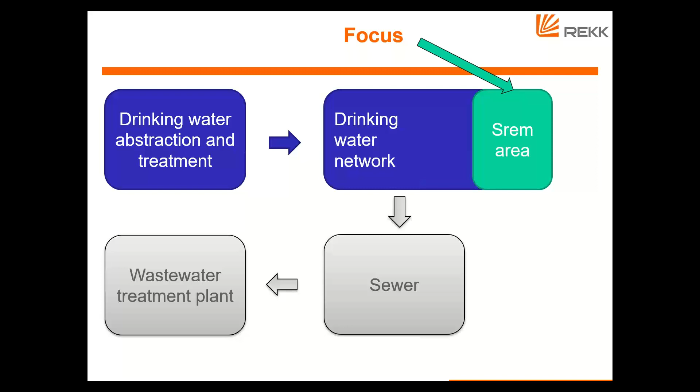All of these components can be substantial energy users. In the case of Novi Sad, based on the project concept, we focused on the drinking water network, and within the network we selected one area, the SREM area. Novi Sad is kind of like Budapest - there's a flat part and a hilly part, and the SREM area is the hilly part. Even though only less than half of the consumption of drinking water takes place in this area, the majority of the drinking water network's electricity consumption takes place here. So this is the place that offered the largest possible energy saving opportunity for us.

So we wanted to know about this opportunity, whether there are sensible measures that can reduce energy use. This was part of the engineering analysis to create a hydraulic model, and Zsuzsa and Erzsi from DHI will talk more about that. Based upon this calibrated model, we started testing different measures, different scenarios, and as you will learn, pumping efficiency has been the way forward identified by our experts, our engineers.

Then within REKK, energy market forecasts were created to know the value of the saved energy. If you're talking about an investment into energy efficiency, we should know what are the returns. These forecasts, since we're talking about long-term investments, are very important because we want to know not only the current price of electricity, but also the price in 5 years, 10 years, 20 years.

We also quantified the related background CO2 emissions, because the electricity is purchased from the network, and there are some power plants which are fossil fuel based and emit carbon dioxide. So we wanted to know what is the carbon dioxide emission related to the energy consumption and also to the energy savings of the Novi Sad Water Utility company.

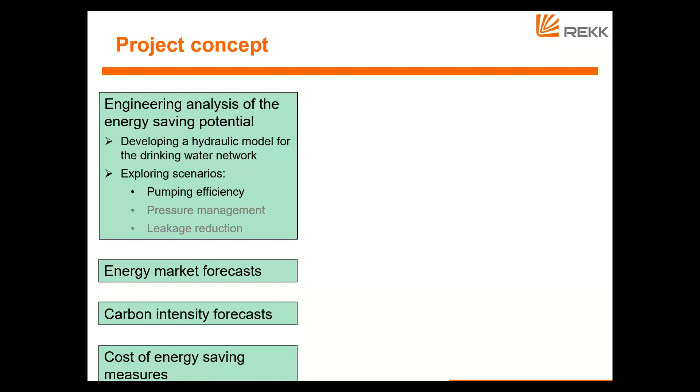And finally, once the energy saving measures were identified, we wanted to estimate the cost of these measures, the cost of the investments. Then when we have all of these components together, we can create a cost benefit analysis to see how feasible these measures are. This is a key output of our project.

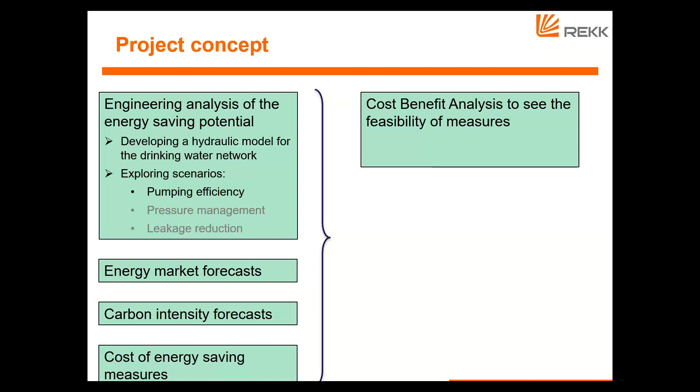At the same time, during this 1 year, we also wanted to provide and share some of our knowledge and experience with the employees of the Novi Sad Water Company, especially about the hydraulic model's operation, which they can continue to use after the project ends. And then we have dissemination as also a key target - we are holding this webinar today.

There will be a report in English in the coming months, and the executive summary of this report will be translated and made available in the Western Balkan languages. So in a nutshell, this is the project concept, and within today's session, we are going to start.

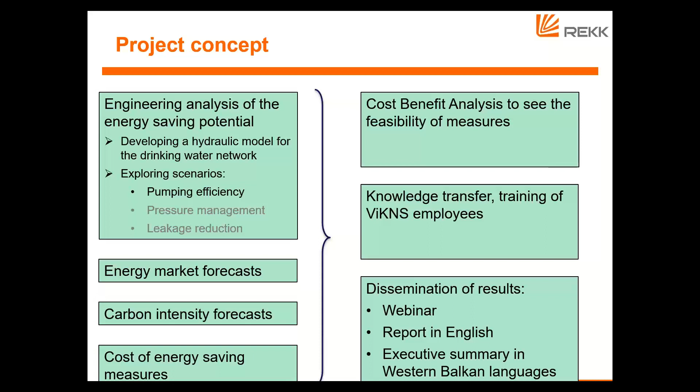Zlatko will tell about the Novi Sad Water Utility company and the drinking water network. Then DHI colleagues will talk about the hydraulic part, and then we'll go on to the economic components of the project. So I hope that you will find it useful. With this, I'm ending my presentation, and let me hand the floor to Zlatko now.

Hello, everybody. Do you hear me? Yes. Okay, so ladies and gentlemen,

Now we are going deeper into the technical aspect of this project. I will make some kind of introduction of the project, to describe to you the water network, water system of the city of Novi Sad. That is the second largest city in Serbia, with a population of about 400,000 people.

Now I would like to share my presentation with you. Is it visible? Do you see it? Yes, we can. Yep, okay.

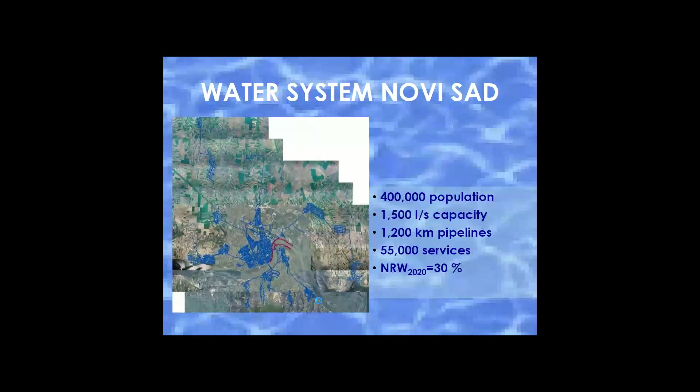So this right bank of the Danube was the subject of our project, in a sense, to establish a model, to calibrate it, and finally to make an energy efficiency analysis with some case study and cost-benefit design, with the proposal that designers finally gave to us as a final report.

So the subject of the modeling was a network of approximately 200 kilometers of pipelines with 15,000 connections, mainly house connections with individual houses, 15 reservoirs, 14 pump stations, and finally 15 pressure zones, with a population of about 60,000 customers. I made a question mark here because the last census, the counting of the population, was established last time in 2011, and we expect it to happen again next year.

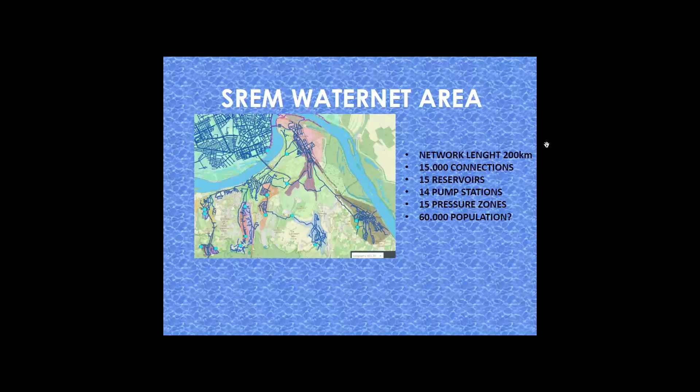The SREM waternet area was an extreme complex system for modeling. This dozen of pressure zones are split, physically split with breaking of pipeline of closed valves. It was important during the designing of the model to define each point to be very precise and detailed, to really establish the model as similar as possible with the real position in the system.

Also, the database of consumers should be established in a manner that each connection was at the place, at the node, at the junction of the system in the model, as it really is in the field.

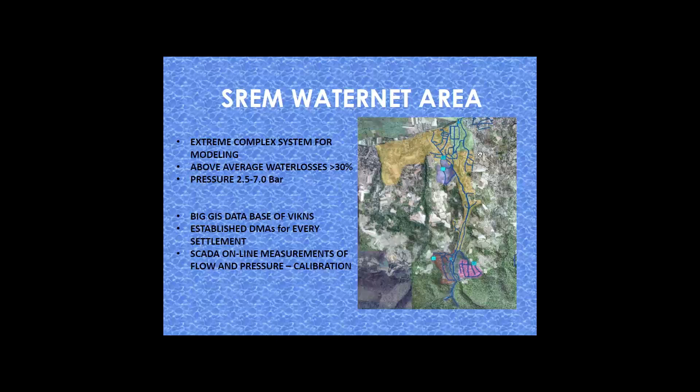But finally, through this cooperation and partnership with the designers from DHI and REKK, they did it. Finally, here we are at this final presentation at the end of the project with a successfully established model that was actually a base for the further step of this project: an energy efficiency analysis, with results that will be explained to you during this webinar in the next presentations.

So I just explained and described this system. I hope that you can now have insight to understand how this system works, how it looks, as an introduction to make it easier to follow the next presentation, where my colleagues from Hungary will go deeper into technical aspects of this project. This is just one sketch of our GIS platform that we use every day, and the database used in this modeling was actually obtained from this huge amount of database from our GIS database.

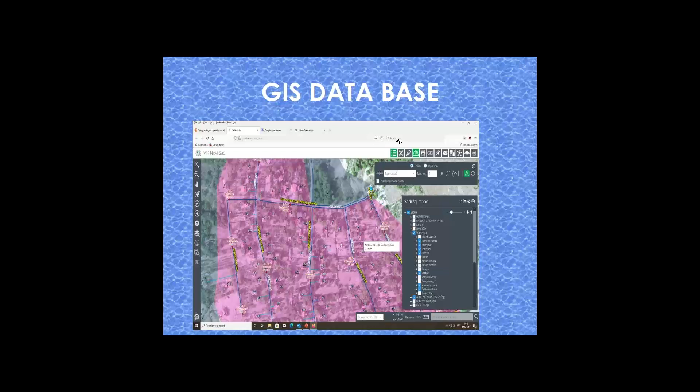Thank you, Zlatko. I think this has been a great introduction to Zsuzsa's presentation, and I don't take any more time. So Zsuzsa, please. Now that you can see, can you see it?

Yes, but it's not projected yet. Okay. It's okay now, right? Okay, so I hope that right now it's fine.

So welcome everybody. It is our pleasure to be able to present to you the results of the project from the part where we were responsible. It was a very challenging and an extremely nice collaboration, I have to say. It was challenging because of the pandemic, and also that we could not meet personally except at the beginning and at the end. But the collaboration was really great, and let me thank here all the inputs, all the effort, and the great job which was done on the Serbian side at the water utility company.

Without them, this project and this result we have presenting right now wouldn't have been possible to carry on at that level. Indeed, as Zlatko presented, our task was to define the network system, to describe the network itself from the water supply perspective, how the energy is used.

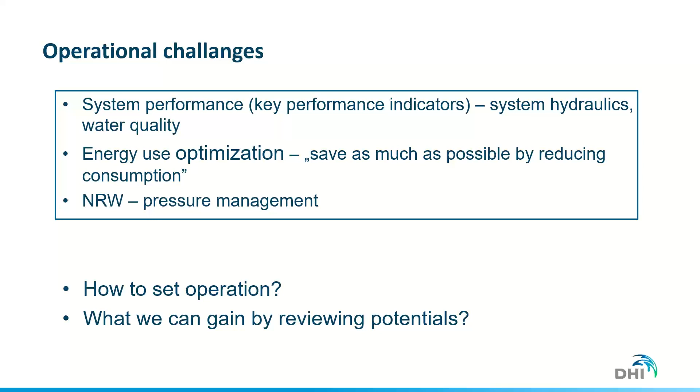So the big challenge right now is, if we would like to put together all these things, how is it possible, how to set the operation so we fulfill the energy use optimization, fulfill the system hydraulics expectations and the water quality issues, especially in very complex systems, and what we can gain if we start to understand the system, and what we can gain if we really look into the backside and review all the potentials, or at least selected many potentials.

So the question comes, what can we do if we take this line, where can we arrive if we do business as usual. Each water utility has its own mindset, how they operate the system, from habit and from business as usual, because this is what they know, this is what they feel is the ground, the base, because they have many years of experience.

Indeed, we were also interested in what will happen if we change our habits a bit, only a little bit, which means a change in operational rules, and we try in some terms to risk something which is out of the business as usual.

Indeed, the question also comes, what will happen if we even invest in big changes, whether there are options for these kinds of big changes, but potentially driving to big gains. And then again, as the unusual approach, if there is any gain, if we look at savings from the non-standard perspective.

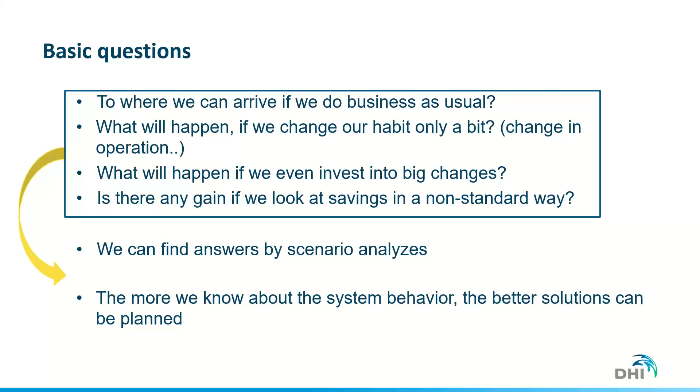So it means that we can analyze this through scenario analysis. And by knowing more about the system behavior, we can better plan what we can do and how we are going to do it, because we know how to make it.

This is a very complicated system, but to describe the system behavior and deliver it in an understandable way, we need the digital twin, a visualized descriptive method of the system, which could be delivered as a calibrated hydraulic model.

It was very interesting during our discussions and workshops, since typically in water utilities there are separated groups working in energy, hydraulics, and GIS departments. But once we put these teams together as a pre-requirement for the hydraulic model, it leads to common knowledge and common experience.

This common knowledge can drive us to a very high level of system performance analysis and understanding, which can lead to very good results in terms of delivering good potentials for system improvement, through measures such as investments, operational changes, or both together.

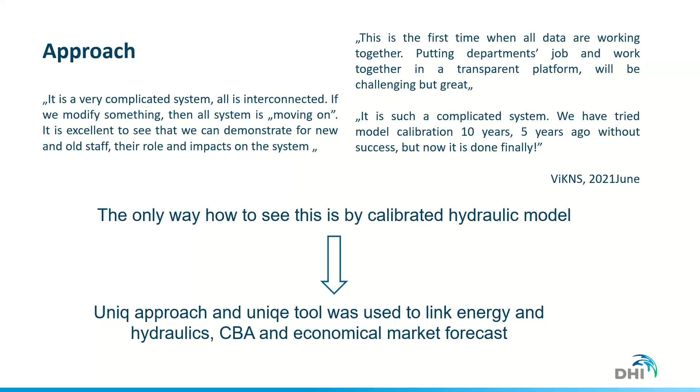This was a big challenge also for our water expert team, to develop this link and to have the work of a completely different sector, the energy sector experts, included in that.

So there's a solution that was developed, and we really implemented the work in such a way that we described the entire system, not just bits and pieces of it, and looked at what happens.

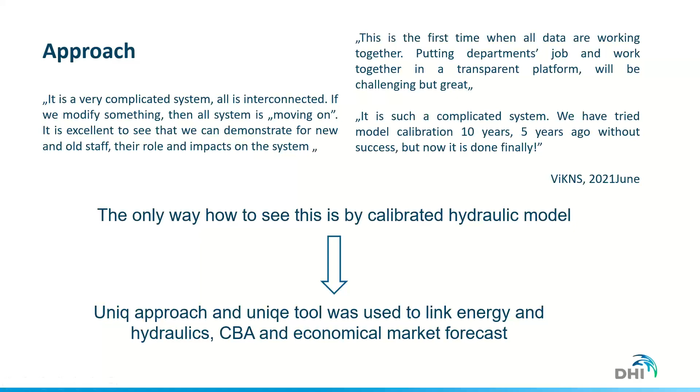As we mentioned, once we see how we modify one element in the system, we could also see how this modification moves through and affects the system. As you see, the system is very complicated, and my colleague is going to explain a bit more in the following slides.

If you make a change in one part, like the element containing 14 pump stations, which means approximately 45 pump units, changing something in one pump definitely changes the hydraulic conditions and water quality in the system.

So it was very important to provide a system that describes this from this perspective. This could also be presented to different units in the water utility company, each targeting only one area or field of expertise, so whoever is responsible for one pumping station could see the impact on other pumping stations as well.

Because as you are working, say, in the airport in the tower, there are so many flights going there, and you cannot concentrate for a very long time on all these patterns. Here we have the descriptive tool, which could substitute this, so you can concentrate on your task, but with this help you are able to see what's happening in the system itself.

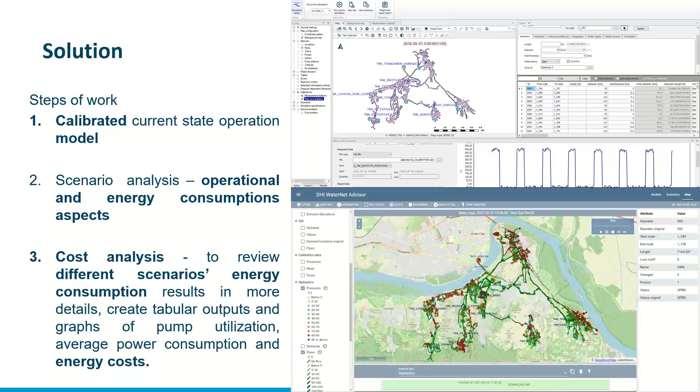So then let me give the floor to my colleague, Mrs. Erzsébet Piesko, who was the leader of the modeling team, who will now describe the modeling that has been done, and also pick up one or two results that were delivered and discussed.

Just really shortly, our main aim was to develop a model, as already Zsuzsanna and Zlatko told you, that can describe all of the operations inside the network, with as minimal schematization as possible inside its operation. So that was our main aim: to have this operational model, this extended time period model, developed based on longer time period statistics that can be used for further analyses.

So altogether, what you can see here you can compare with Zlatko's presentation before. Some small schematization was needed, but altogether we have all of the main hydraulic elements of the model implemented, all 45 — it seems we ended up adding one more, so it's outdated from yesterday's presentation. Some of the reserve pumps are also implemented, and all of the tanks and breaking chambers were implemented in the model, so that it's not just serving the purpose of cost analysis, but also serves as an operational tool in the future for the water utility.

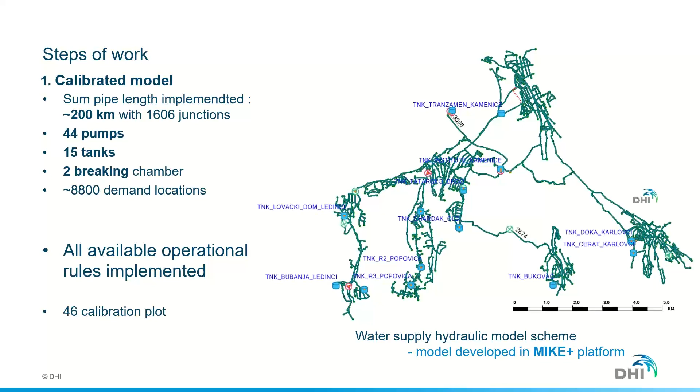So we built the hydraulic model based on the GIS customer information system and other sources available, made in commitment with the group together with the local users and the local water utility — some changes in the model, some cleaning and revision of the already available high quality model, high quality data. But it needed some, so to say, some improvement to be implemented inside the model itself. So this digitalization and revision of all the information in one platform was integrated into our model.

And it also integrated the local knowledge of experienced users and experienced operators, because some of the data cannot be written inside, so to say, in PDFs or Excel sheets or GIS systems. Some of the local water utility members really gave their all to be able to build a very high level model for this network.

So in the end, we calibrated for a selective time period in September 2019, but we also used validation data from other time periods. As Zlatko mentioned, we used one year of time series to be able to build this model.

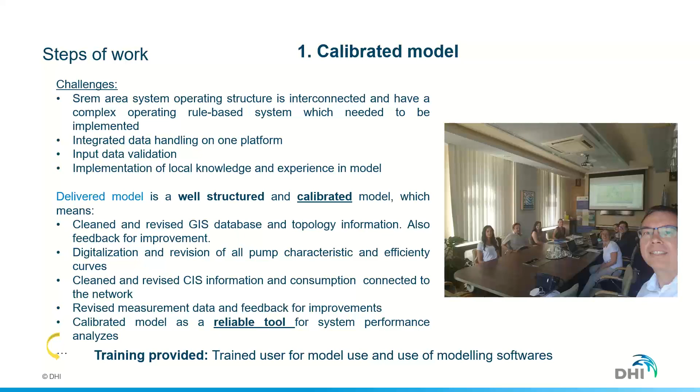This is the one we were only able to hold in person. The others were held online. So altogether, we developed...

The energy optimization consists of the review of the pumps' operation, their efficiency, and also a system-wide energy audit. Based on that, we came up with different kinds of scenarios, some of which you can see on the slide itself.

Also what later on András and Enikő will present in the later sessions. We also took into account not just the technical and operational aspects of the network, but also what would be more beneficial in financial aspects of energy usage.

So that's why it's hard to say how many scenarios we actually had. We actually started with over 40, and we had to go down and cut it down, because some of them...

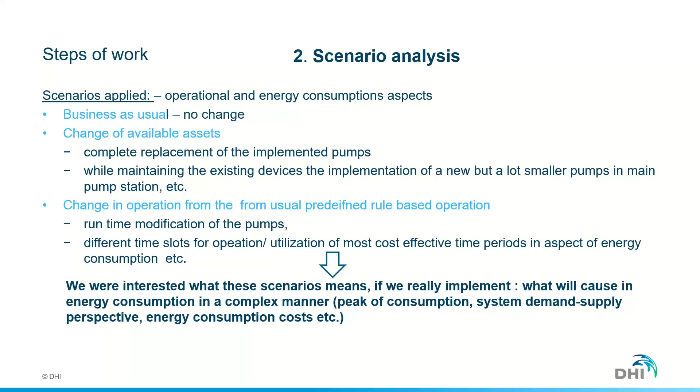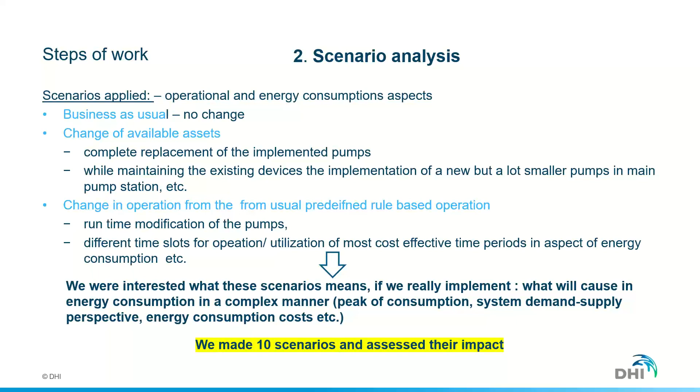But actually, there were many more KPIs that we took into account when developing our model. So altogether we took into account 10 scenarios that the colleagues and András will present later on. I will explain in the next slides why and how we chose these.

So actually, the scenarios take into account both technical and energy aspects of operations, and the energy audit is based on our hydraulic model that's calibrated for the already available data. We use the results as tabular reports and graphs for pump utilization.

We calculated average power consumption and energy costs in different scenarios in 10-minute time steps, which consider both energy and operation aspects. We also calculated peak, average, and minimum energy consumption for all the pumps system-wise, and later on focused on the pumps and pump stations.

Actually, in our case, it was one big pump station that we had to mainly focus on, because that was taking most of the energy in our case. You can see on the right some of the outputs that are already available.

This is actually some of the inputs for the analyses that REKK and András were making. These are what's already available for the users as tabular and graphical output for our cost analysis part, and also the energy analysis part.

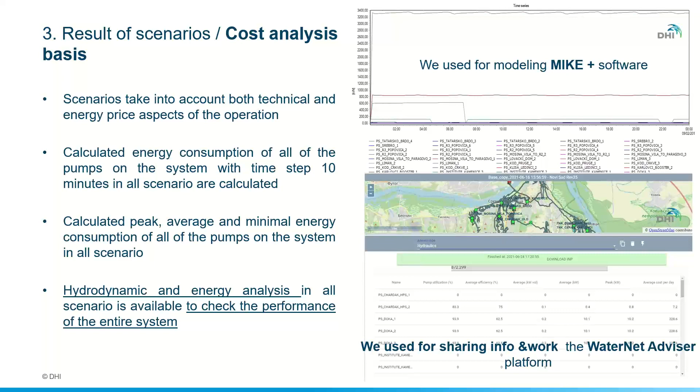As I mentioned, our main target in the end was the main pump station, Liman. As you can see, it is on the other side of the Danube bank.

As this main pump station was consuming most of the energy, scenarios aiming at the Liman pump station gave the best results for our further analyses. So actually, what we were talking about...

We can summarize it in 3 main scenarios: either complete replacement, implementation of a bypass or auxiliary pump, or runtime/time modification of the pump. Mainly, using these scenarios for the optimal time slot or energy cost was not always possible to fulfill the system demands, or it could create hydraulic conditions that cause operational problems.

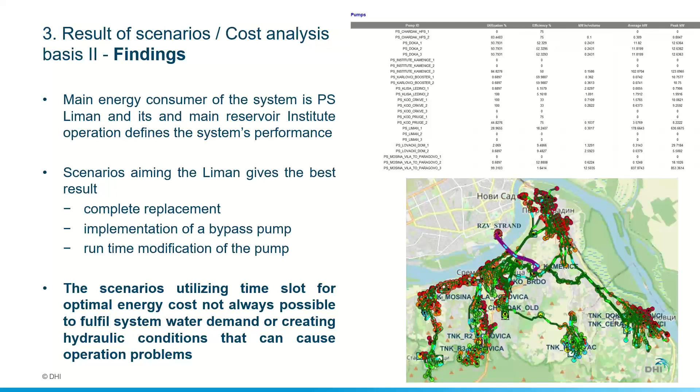We were mainly looking at - Enikő will show the energy sector forecast - and we were mainly using her findings about the energy sector, aiming for more optimal operation in terms of energy consumption.

So altogether, because of time constraints, we cannot show all of our available scenarios. We will be using the Liman scenarios as the main scenarios. As you can see, these are the main 3 elements of what we were aiming for.

So the complete replacement of the implemented pump with a different kind of efficiency and larger performance reserve, or also maintaining the current assets and adding auxiliary pumps or bypass pumps.

We also made these changes, maintaining the existing devices and implementing additional devices in order to reduce the load of the main pumps, to increase the efficiency and the reserve inside the pumps.

So we were also making different operational changes. In what András will show, we will take into account the longer operational hours, or different operational hours, and how does it affect the operation of all other pumps inside the network itself.

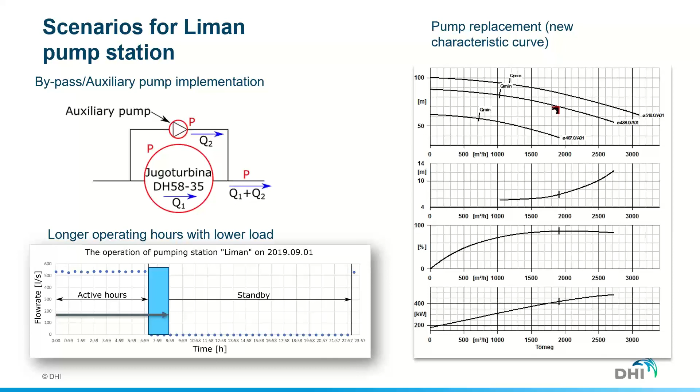And what we also use, these are the tools that we use for analysis. Both graphs and tabular analyses are available. We use the MIKE+ platform with water distribution extension, and also the WaterNet Adviser.

This is the online tool for further analysis. It also contains most of our tools for this analysis, as I mentioned, and these will also be implemented inside the water utility itself. These were the tools that supplied the basis of the further analysis by András and other results.

So thank you, Erzsébet. As the last sentences, I would say as the lesson learned for this exercise, which was really a complicated system, but a very nice system, and took a relatively long time to arrive at this point, because to find the best solution or the best options, it needs iteration to understand the hydraulic, water quality, and energy relations by changing the elements of the systems.

And indeed, if we have the change of the daily price of energy, and we take it into consideration, and we try to find the best solution, we always need to check whether the system capability allows that, as well as the hydraulic or water quality conditions of the system, how it would look if we implement these measures.

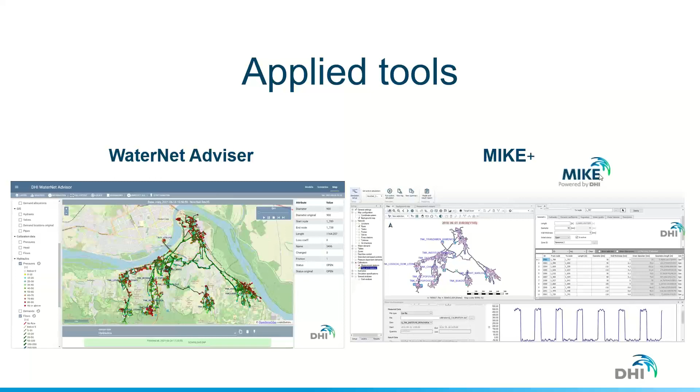Please, Enikő. Thank you, I just try to share my screen. I hope you can see it. We can see your PowerPoint, but not the projection yet. Not yet, I tried to enter the full mode. Maybe. Okay, just a second, maybe I just try to share the screen itself. Just a second. We can see the presenter mode now. Presenter mode, oh now it's fine. Now it's good, okay great. Sorry, I have two monitors and sometimes... Okay, so thank you very much.

As we are already ahead of time, I will try to be as brief as I can, and we will still have some time in the question and answer session to clarify things. So what I would like to talk about now is the electricity price forecast that we carried out for this project, and also the logic of the energy cost calculation that was based on this forecast.

So the structure of the presentation is that first I would like to share a few things about the market model itself that we used for this forecast. Then the main part of the presentation would be the exact electricity price forecast, and also the forecasted CO2 intensity of the electricity production. Then I will turn to the logic of the cost calculation. But actually all the results will be summarized by András in a later presentation.

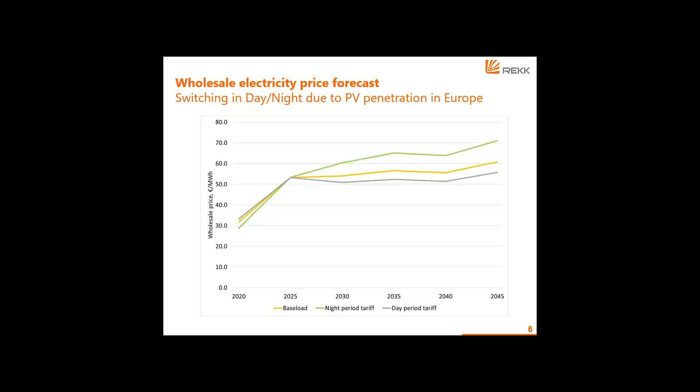So this is basically our forecast until 2045. Here you can see the average yearly prices. Baseload means the total yearly average, and then we had the different tariff periods, so night and day period averages for every year. You can see this switch from around 2025, but very clearly after 2030, that the night period tariffs are much higher than the day period tariffs. This is mainly driven by solar energy.

Just a few words about the CO2 intensity of electricity production. The key issue here is that in the future we will have much less fossil production and much more renewable, and this leads to a drastically decreasing CO2 intensity of electricity production. From 2030, we have around 30 or even less kilograms per gigajoule CO2 intensity in electricity production, while nowadays we are over 200. So this is absolutely a drastic decrease.

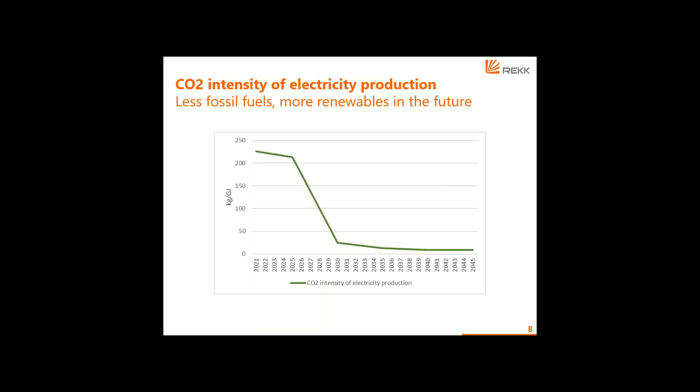What we can also see is that, again, in the middle of the day, we have in the future this lower CO2 intensity because of the higher share of renewable production in those hours. So this is absolutely in line with cost-saving efforts. It's good news that when we want to save cost, we will most probably save CO2 emissions also.

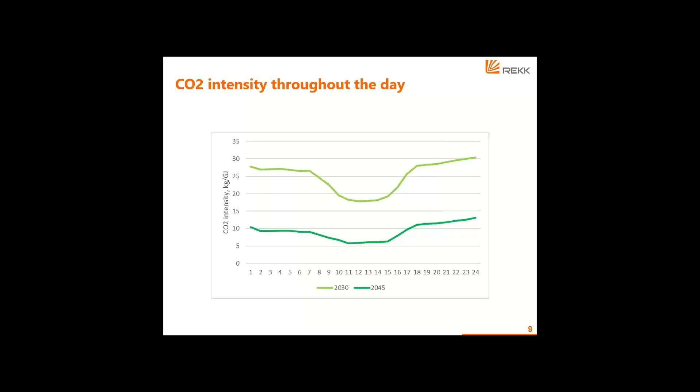Just a very few thoughts on the logic of the cost calculation. Basically what we had as a starting point was the elements of the present pricing. We received different existing bills from the partners, and based on that we created the future energy cost calculation. Most of the elements were kept at their present levels, but the energy fee was the one that changed across the years and the scenarios.

According to these bills, what we see now is that we have a high and a low tariff period - that is basically the day and the night hours of the given year. The consumption is just put into these two periods, and we have these two different tariffs, both for the network tariff elements and also for the energy component.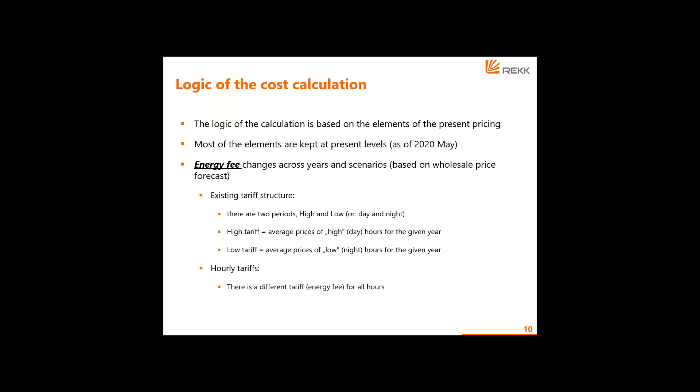What we assumed, in line with the liberalized energy market experiences, is that later on hourly tariffication will take place. That means that as we have different prices for different hours in the wholesale electricity market, this can also be reflected in the bills at the consumer level. So if you have different consumption levels in different hours, you will also have different tariffs to be paid in those hours.

This is basically how the cost calculation looks. We have the network fee element of the total cost, which in our assumptions for the future also equals the existing structure. Then the main part where restructuring of consumption, and also the level of consumption, can have a great effect on the final cost is the energy component part, where we have these hourly energy tariffs and also the hourly consumption from the hydraulic model.

And of course there are some other fees, such as taxes and levies, the energy efficiency levy, excise duty, and so on. We took all this into account when we calculated the total cost.

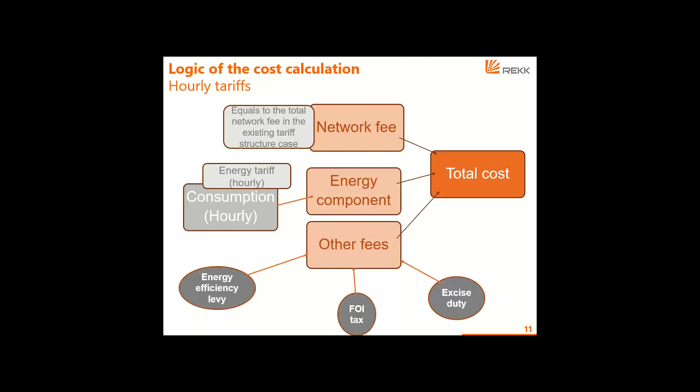And then, of course, we can have these different scenarios with different consumption patterns, so we will arrive at different energy costs in these cases - but this is something that András will tell you more about. So I just wanted to say all this, and I'm absolutely happy to have your questions after András' presentation. Thank you.

So let's see how hydraulic modeling and energy market modeling and other elements come together to provide the full picture. Erzsi was describing the wide range of scenarios that were analyzed, and out of these we selected the scenarios that make sense from the perspective of energy saving, water quality, hydraulics, and so on. This resulted in a baseline scenario and six modifications of the baseline.

What are the modifications? In S1, the original pump, which is Jugoturbina - the big pump that is supplying from the drinking water treatment plant the SREM area - is exchanged to a brand new pump. We were working with a specific pump, KSB Omega C, just because we were able to get a cost estimate for that pump. The same hours of operation, essentially during the night and early morning.

In case of S2, the original Jugoturbina pump is left, but there is a bypass pump, as explained by Erzsi, to reduce the capacity requirement and make it easier for the pump to operate. This also requires a frequency control device - so this is a bypass pump and frequency modulator. Again, the same seven hours of operation.

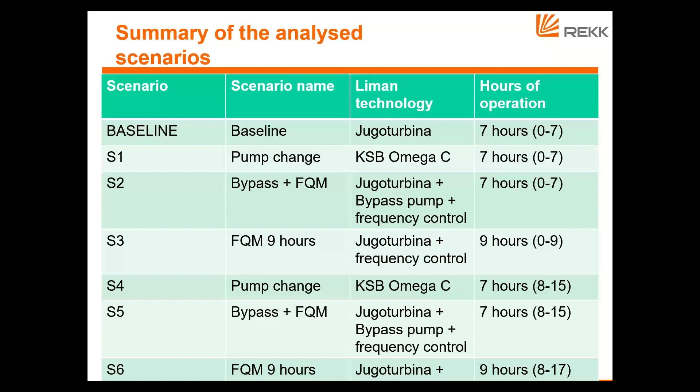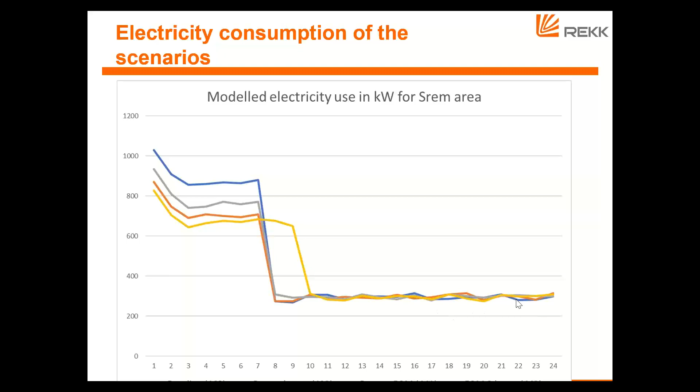So these are the baseline scenario and S1, 2, 3.

Here, same story, same technological applications, except that now the hours of operation in the scenarios shift from the night to the daytime because of the expected price drop during the day, due mostly to the solar penetration, large solar volumes. So very similar, but we still had to model it because there are different consumption patterns during the day and during the night, and it's important for us because whatever happens in the system, as it was explained by Zsuzsa, it has an impact on something else.

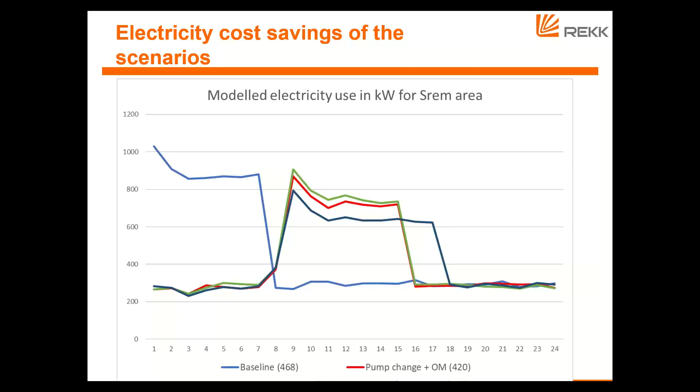So we cannot just simply assume that we have the same consumption as in the night. In the day, it is somewhat different. Not much, but there's a difference.

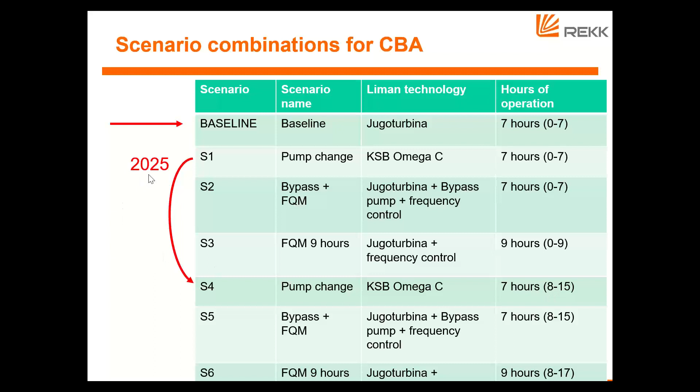From the original 7 scenarios, we created some combinations. So we have the baseline, and then there is this pump change scenario. But we assumed that from 2025, we are shifting the hours of operation. Same technology, but the new hours of operation, because from that point on, it becomes more attractive.

With the bypass and frequency modulator, same story, but the shift already happens earlier. And with the frequency modulator and 9 hours of operation, the shift happens already in 2022, mostly because the 9 hours of operation already extend into the morning rush hours as far as the morning peak consumption on the network. And this is creating a slightly different consumption profile, and it makes sense to already shift the consumption to the daytime hours. So it can happen actually rather soon on the open liberalized electricity market.

We also did a shift in the baseline because as we inspected the scenario, it turns out that from 2025, it makes sense to shift from the night to the daytime hours. So we have 4 scenario combinations, and these are the ones that we are going to compare.

We also had some hydraulic model runs in which the hours of operation were split. So some of the peak hours stayed in the night, some of the peak hours went to the daytime regime, but running these pumps at peak capacity twice a day means some problem for the network hydraulics.

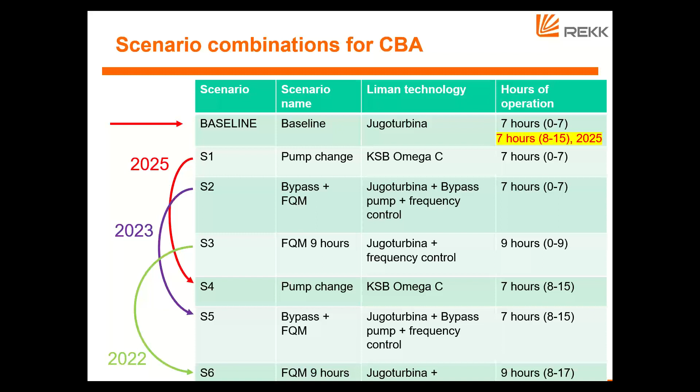It can create pressure fluctuations, and that can result in breaking pipelines. So we eventually disposed those scenarios, and we stick with the ones that you see on the screen.

So we did the cost-benefit analysis. What are the main components? We are looking at the current investment costs, changes in maintenance costs, future electricity cost savings. We are also looking at the carbon emission savings, but we didn't make them part of the CBA, the cost-benefit analysis.

Because that's like one large step how to sell carbon savings, so we will cover that, but we didn't make it part of the balance, CBA balance. And we calculated present value for all scenarios and also internal rate of return.

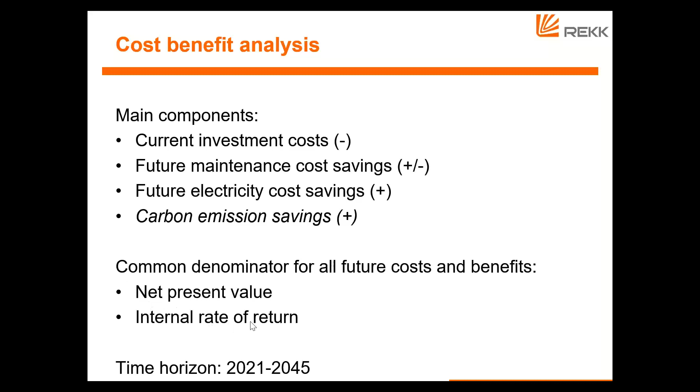For present value calculations, since we are running short of time, I don't want to spend now time on this, but if you have been doing cost-benefit analysis, you know that any money that's further out in the future, it means less current value for that money.

Same as with a bank account. If you put some money into your bank account and there is an interest rate, then in the future that money will be more valuable. It will have earned some interest rate.

With discounting, we do the opposite. We are looking at the future value and calculating the current lower value. So this is what we have been doing for all the scenarios.

And let's see what are our main assumptions. For the baseline, there is no new investment, but there is an expected reconstruction cost that will take place sometime in the not very far future. And we estimate the cost of 50,000 euros.

We also have a maintenance cost for the pump, the Jugoturbina pump, estimated at 6,000 euro per year. And these are the investment costs for the scenarios with a pump change, bypass pump, and frequency modulation, or only frequency modulation. So you can see this is how much would need to be spent right away.

But in exchange, there is a lower maintenance cost annually, and also there are lower electricity costs, as already suggested by lower electricity consumption figures.

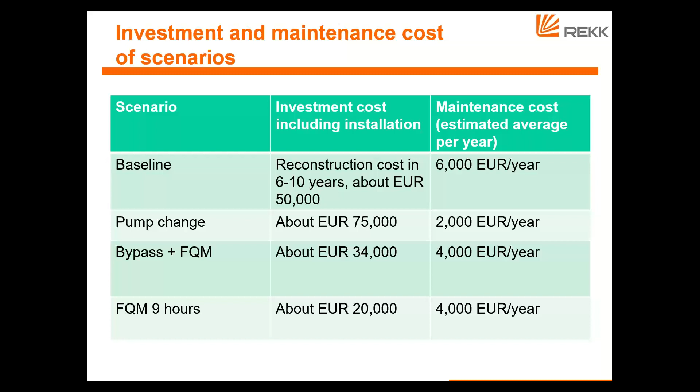We also did a stress test of our scenarios, assuming the situation is not as rosy as it originally looked. What if the reconstruction cost is actually less than 50,000 euros, making the baseline more attractive? What if maintenance cost is lower, again making the baseline more attractive? And what if the investment cost of all these different technologies is more expensive, making these less attractive? We are trying these figures to see if assuming less attractive components for our cost-benefit analysis would still result in an attractive outcome.

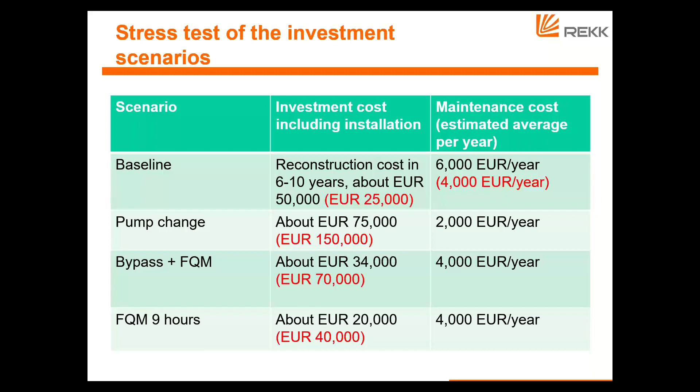This is the diagram about the annual energy costs of the Srem area in euros. You can see that it's about 200,000 to 220,000 euros today, but because of rising electricity prices, it will increase to about 300,000. However, installing new technologies will save substantial amounts of the electricity bill.

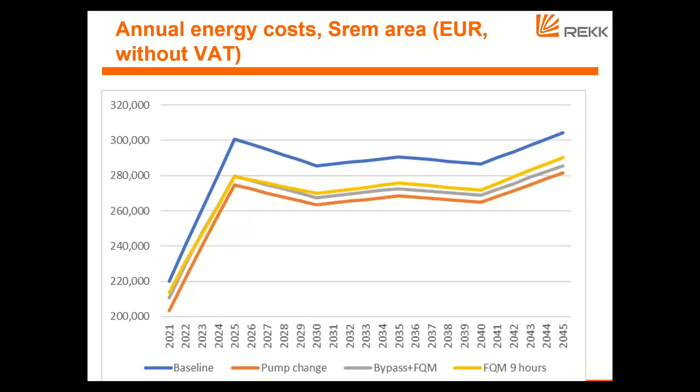Here we have the discounted values of all the savings, electricity cost savings over 25 years. If we just have the nominal values, which means we're applying a 0% discount rate, then we have these figures: 380 to 550,000 euros altogether in present values, covering the 25 years.

But even if we apply a discount rate, the larger the discount rate, the less valuable some future saving is for us today. So if we apply a discount rate, that will reduce the present value of the savings, but still these are substantial figures: 200,000, 300,000, 400,000 euros, depending on which investment or measure we pursue, and depending on the interest rate.

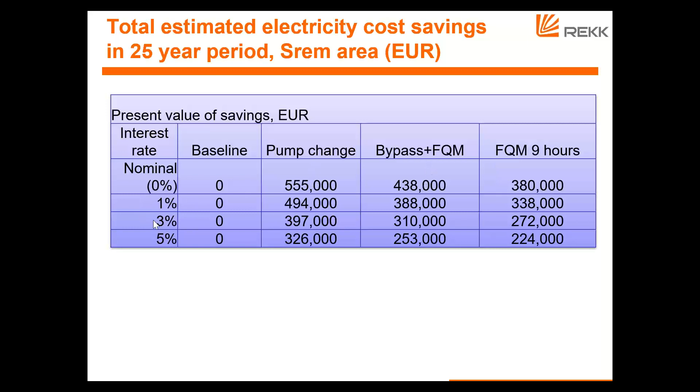So putting all the pieces together, comparing to the baseline, these are our figures. Concerning the investment cost, in the baseline there would be some reconstruction cost, but compared to the baseline, there is no shift.

Buying the new pump would still result in cost. Cost items are marked with a negative sign. However, these other two technologies would be less expensive in present value terms than the baseline reconstruction cost, so actually there are already some savings. And if you look at maintenance costs, there are continued additional savings. The electricity costs, again, show savings.

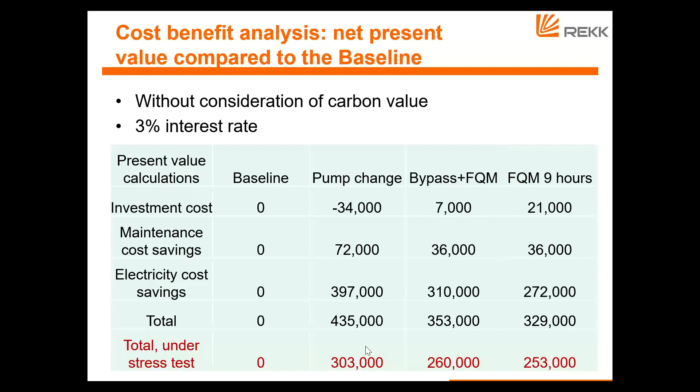So this is, I think, quite good, quite attractive. And if we look at the internal rate of return, that's equivalent to looking at doing an investment - like a pump change - and how much return it would generate annually.

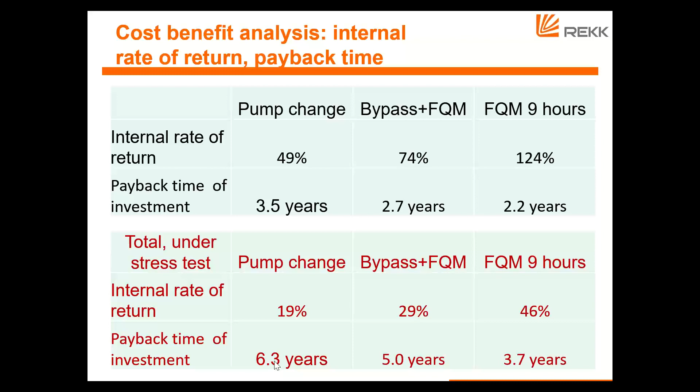Now, what about the carbon emissions, which was already mentioned by Enikő? These are the total carbon emissions behind the current electricity consumption. As it was indicated by Enikő, the carbon intensity will drop. But if we do the investment today, we are already saving some carbon emissions because of the lower electricity consumption.

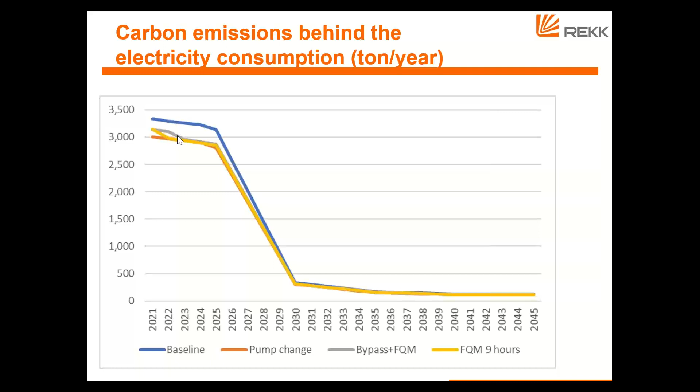These are just the differences between the different scenarios. So a couple of 100 tons of CO2 per year can be saved for the next 5 years, and then it will keep declining. So altogether, compared to the baseline, more than 2 kilotons of carbon emissions can be saved.

And if we look at the European emission trading market, which has a quite transparent price, we can assume that the value of a ton of CO2 emission reduction is about 50 euros. And with this 50 euros, the total benefit from a CO2 reduction is more than 100,000 euros.

If you recall the figures, I told you that the investment cost would be generally less than 100,000 euros for any of the scenarios. And even the carbon emission savings, the value of these savings is higher. So this shows that these investments are good not only strictly from a financial perspective, and they are excellent investments from a financial perspective, but they are also good from the perspective of quantified emission reductions, from the perspective of the value that is placed on emission reductions in the market.

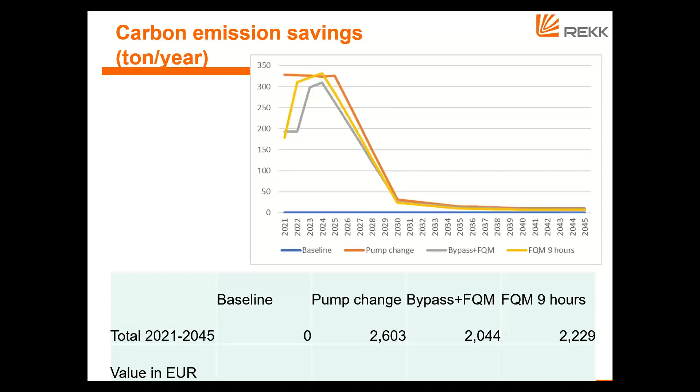Even though we are at the end of our session, I would like to ask if there are, I see some questions here. What is the actual - I'm sorry, can I just close the window because the bells are ringing outside.

What is the actual percentage of energy cost compared to the total operation costs of Novi Sad utility? And what are the projections of the project to reduce the energy costs?

The projections, energy cost reduction, I have shown it to you. In present value terms, it can be a few 100,000 euros. For the percentage compared to the total operating cost, maybe Daniela, if you hear me, maybe can you answer that?

Total energy cost compared to the total operating cost. I don't have it from my heart. We don't see it, but from other water utility companies - oh yes, Daniela is here. Good.